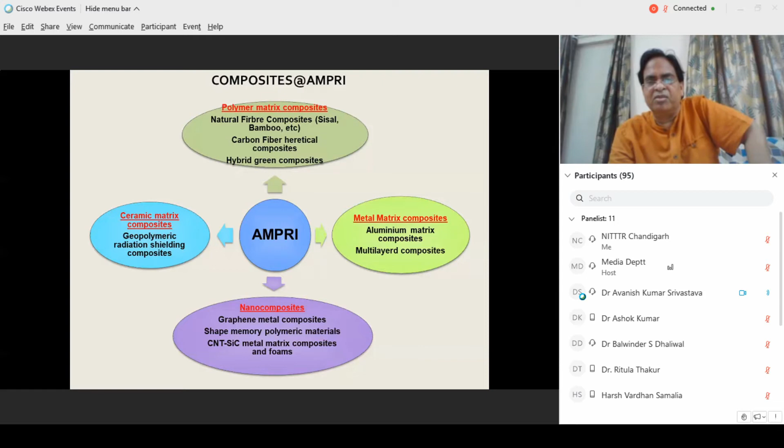Ceramic matrix composites, we have geopolymer, radiation shielding composites. Metal matrix composites, we have aluminum matrix composites, multi-layered composites, and nano composites. We have graphene metal composites, shape memory polymer composites, CNT silicon carbide metal matrix composites, and foams.

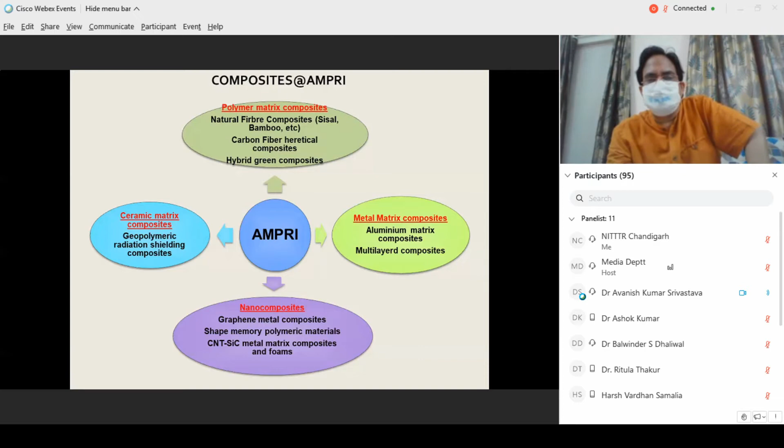Now these pictures are somewhere from the literature again. I did not put reference, so my apologies. But I tell you that metal matrix composites are very important for naval applications.

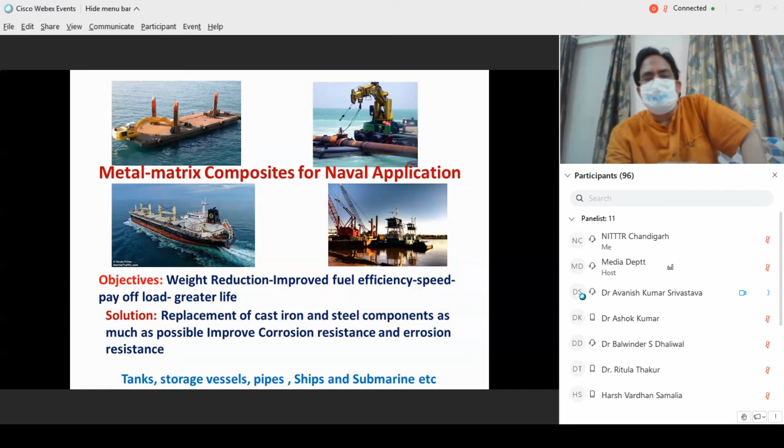The objective here is weight reduction, improved fuel efficiency, speed, payload, and better life. The solution is replacement of cast iron and steel components as much as possible, to improve corrosion resistance and erosion resistance in tanks, storage vessels, pipes, ships, and submarines.

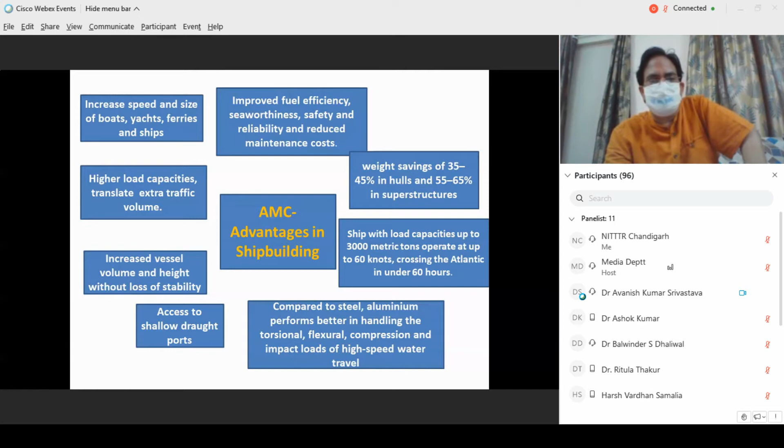Now, aluminum matrix composites, in terms of advantages in shipbuilding: increase speed and size of boats, yachts, ferries etc., higher load capacities, translate extra traffic volume, improve fuel efficiency, seaworthiness, safety, and reliability, and reduce maintenance costs. Weight savings from 35 to 45%, maybe more, increase vessel volume and height without loss of stability, and so on.

It has several required characteristics like good corrosion resistance, fire resistance and retardancy, higher specific strength and stiffness, impact toughness, and damping capacity.

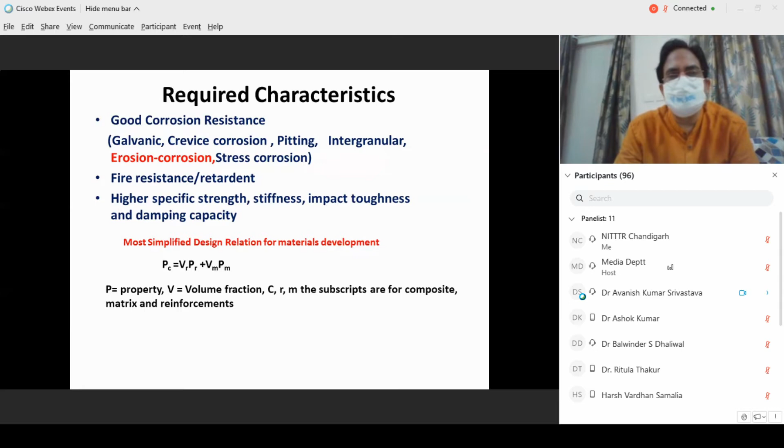So the advantages, if we draw from the mathematical point of view and from experimental data: density of the aluminum matrix composite can be reduced up to one-third of steel. It's resistant to weather, common atmospheric gases and liquids. Strength is quite good, and it maintains its toughness down to very low temperatures, with fair workability and formability, improved abrasion and wear resistance, modulus enhanced from 70 to 240 GPa in composite form, and a good thermal expansion coefficient.

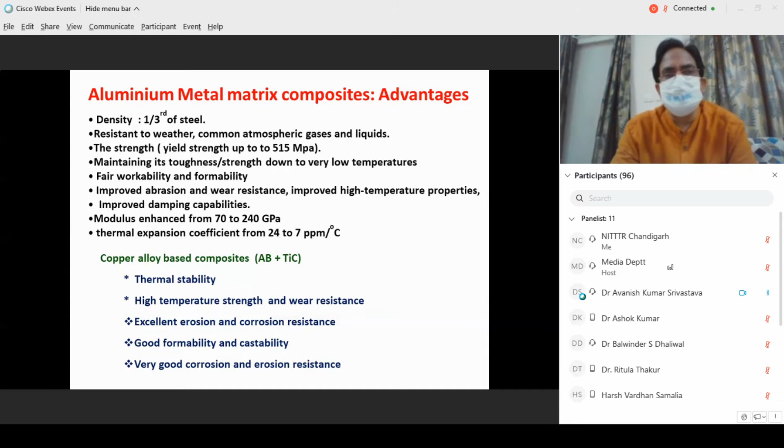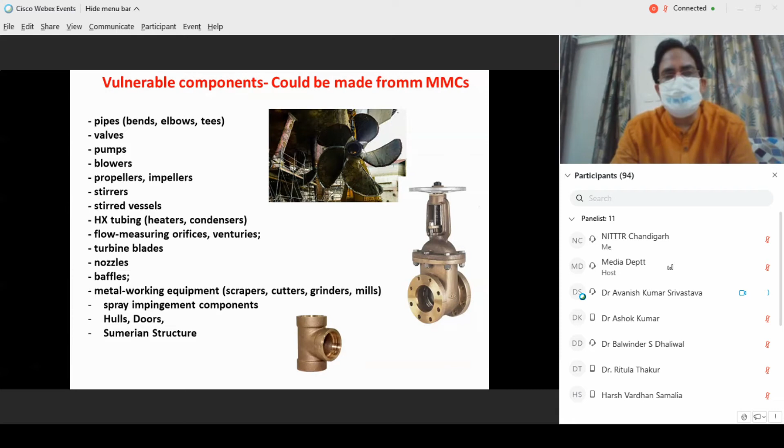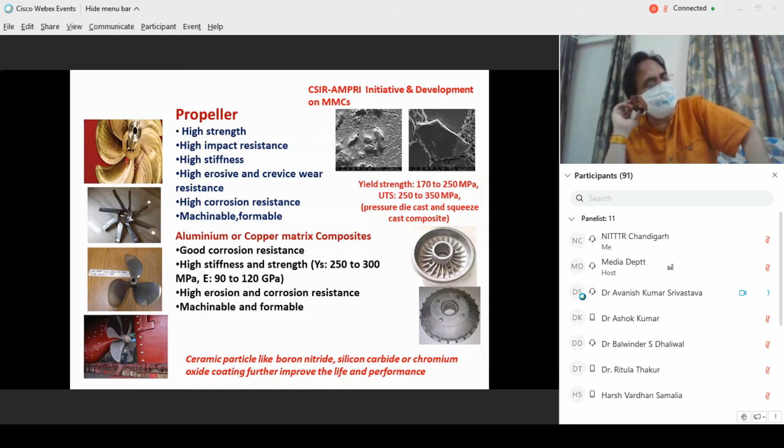So vulnerable components could be made from metal matrix composites like pipes, valves, pumps, blowers, propellers, stirrers, stirred vessels, flow measuring orifices, turbine blades, nozzles, baffles. You need in propellers high strength, high impact resistance, high stiffness, high erosive and crevice wear resistance, high corrosion resistance, machinability and formability. We need all these things, and the composites which we are making suffice this kind of requirement.

Then brake drums we can have, and similarly various other components which we can make. So far, these components are being imported from various countries.

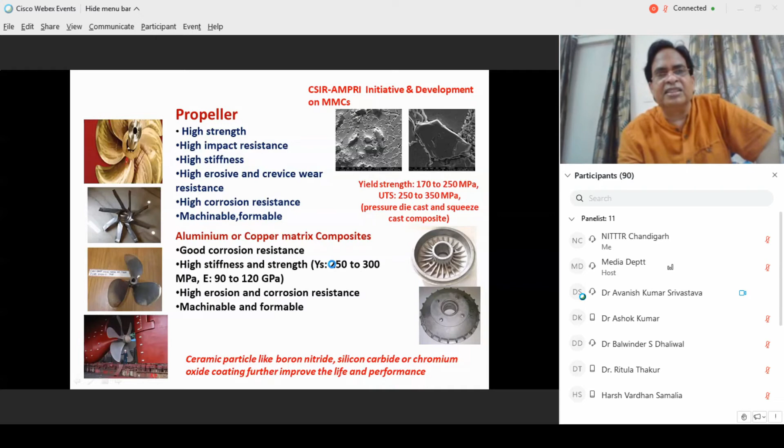Now, coming to closed cell aluminum foam: aluminum foam core steel face sandwich panels for doors and hulls can be made. Even building structures can be made. I'll come again to this slide.

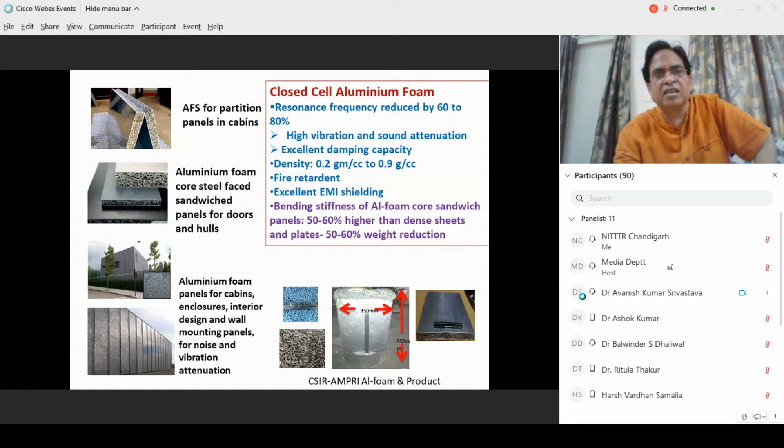The aluminum matrix composites, by stir casting and in-situ technology, we can make 60 kilograms per batch in lab. We have demonstrated brake drums, nose cones, pistons, and connecting rods, and the technology has been transferred. We are still in continuous advancement of these technologies. This is very important for automobile, defense, aerospace, and general engineering.

Closed cell aluminum foams, we can make 100 kilograms per day, we have demonstrated. Density can be varied from 0.2 to 0.8 gram per cc with very high porosity and very good sound absorption. This is important in auto industries for crash worthiness, weight reduction, sound and vibration control. In defense, it's very important for blast resistance, armors, rail and shipbuilding.

An open cell foam of nickel, copper, carbon and titanium, and even aluminum, titanium, stainless open cell foams we can make. Titanium foam biomedical application trials are going on in animals, and for filters, heat sink, catalysts, batteries, capacitors, EMI shielding. So many applications are there, and we are working on various applications.

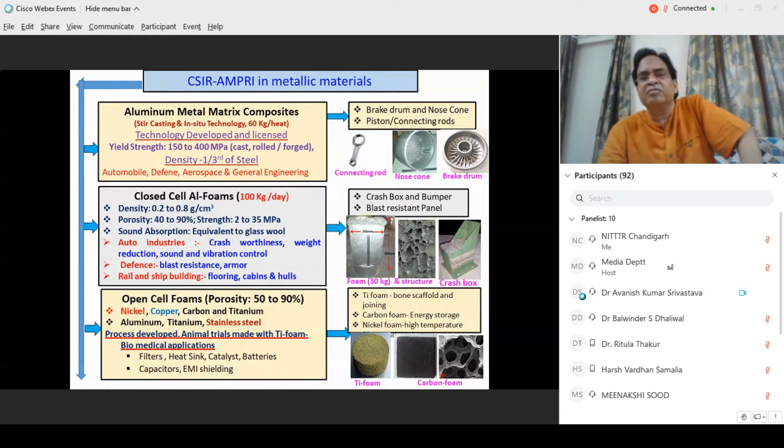We are filing our patents. As far as metallic metals, alloys, composites are concerned, we have already more than 200 publications, and more than 10 patents. Then we have PhDs, MTech theses, technology licensed, and interaction with industries like Tata Motors, Mahindra, Next Motive, Ordnance Factory, and so far 10 technologies are at a very good technology readiness level, TRL more than 4.

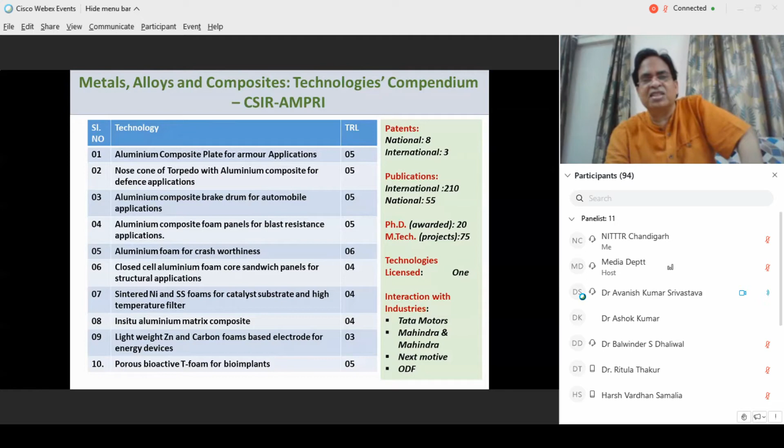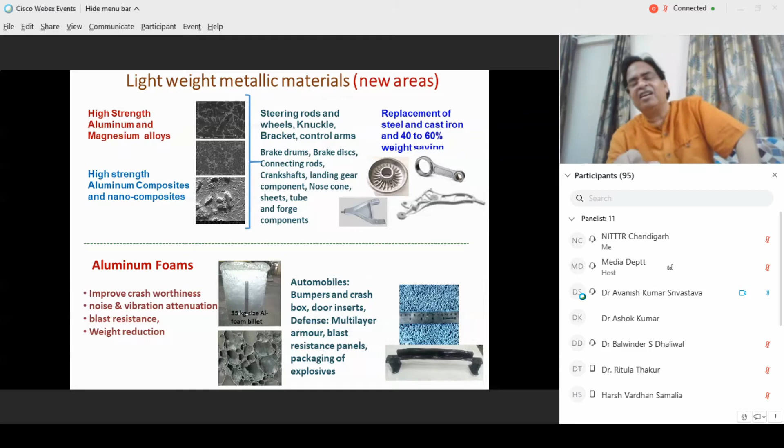As I said, connecting rods and brake drums are from high strength aluminum and magnesium alloy composites, nano composites. Aluminum foams are again important for automobiles, bumpers, crash box, door inserts, and so on. We also do various simulation studies to check, verify, and authenticate our experimental observations, and very good simulation work is being done in the laboratory.

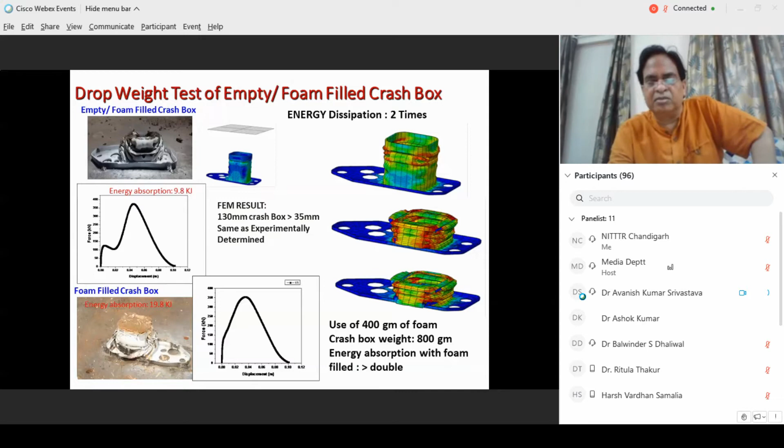Now coming to graphene, that is one allotrope of carbon, and graphene is like a sheet structure having honeycomb design with carbon atoms on the vertices of the hexagonal network. You have single layer graphene and multi-layer graphene. The advantage of graphene is it has the highest surface area, is 100 times stronger than steel, has very good tensile strength, very good Young's modulus, very good thermal conductivity, and good electrical properties. All these important properties make graphene an ideal reinforcing agent in today's world.

We have done this to some extent. We have used stainless steel as a base matrix material, and we incorporated graphene using 3D printing, additive manufacturing, because liquid metallurgy is not a good option for making composites using graphene.

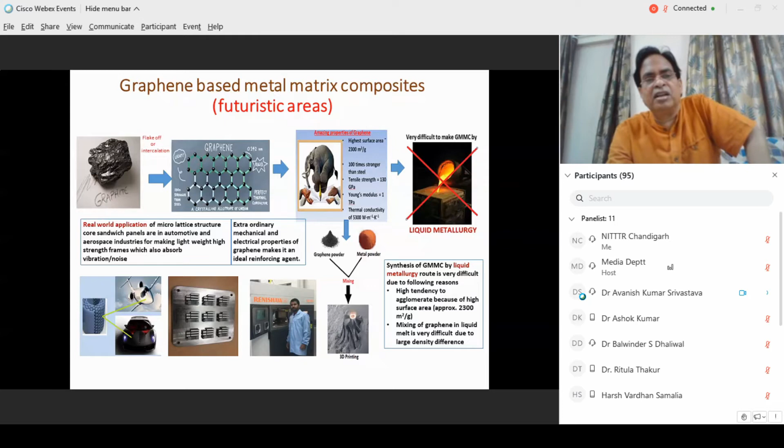Electromagnetic forming is another technique to join dissimilar metals like SS-niobium, SS-titanium, and so on, where you have a very thin interface with very little disturbance compared to the welding process. This is another advanced processing technology which CSIR AMPRI Bhopal has, and we have projects with atomic energy and aerospace related organizations where joining is concerned, and we are trying to make different components for them.

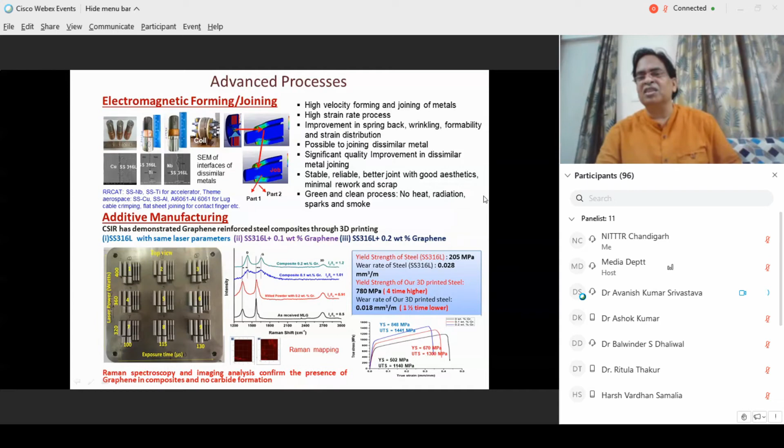Then in additive manufacturing, as I said, we added graphene in stainless steel, and you can see the rods, different kinds of rods we have already prepared. We are probably the first in the country to do this - not to boost ourselves, but this is a fact. We have published graphene metal composite material papers in international journals like Additive Manufacturing, with impact factor more than 6, and Materials Science and Engineering, and so on. You can go through those papers if someone is interested in working on these new areas.

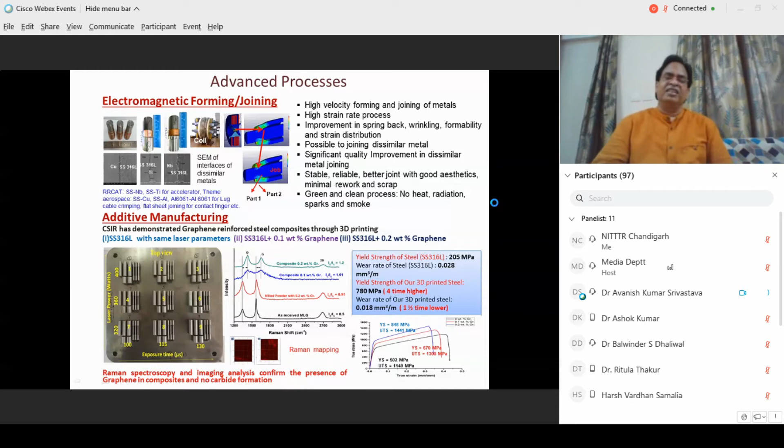Then, as I said, hybrid composites from fibers and waste particulates. We are working with particulates from waste like fly ash, red mud, marble waste, agro waste, and renewable resources like natural fibers - jute, sisal, and so on - mixed with a very little amount of polymers. Although we say the matrix is polymer, basically the matrix is the particulates, it's just reverse. The kind of products we are producing can replace teak wood, and we can stop this kind of deforestation by using these alternate materials.

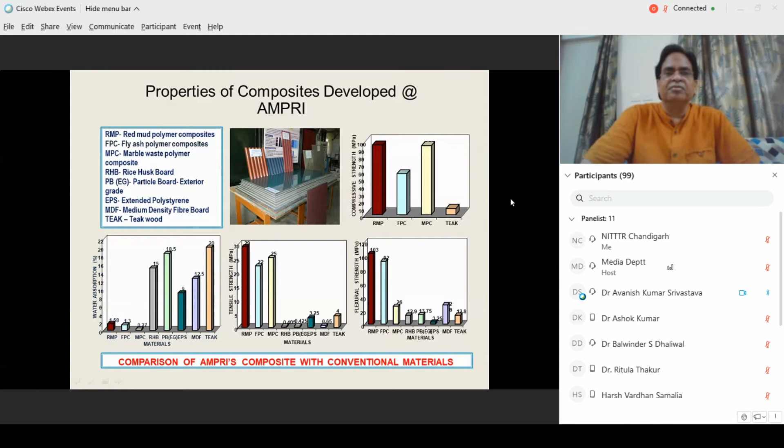So advanced hybrid green composites, I covered a bit. These are the composites which we are making, and they have applications in door, wall tiles, partition, furniture, and architectural cladding panels, as alternatives for timber, helping avoid deforestation. Using fly ash and natural resource management, we save the environment and bring a new class of material to society.

Production process is simple and energy saving, stronger than wood and synthetic wood. Durable and customized products can be made. Resistant to moisture, corrosion, termite free, fire self-extinguishing nature, cost effective than teak wood, timber products, and synthetic wood, and maintenance free materials. We have already protected IPR. In most of these technologies, we have our own patents.

So the opportunities are quite high using this hybrid green composite. At two places, we have already transferred our technologies, like to Siddhi Polymetrics in Maharashtra. And using these sisal-based composites, just a year back, we transferred know-how to the West Bengal government also, under the MGNREGA program, that is Mahatma Gandhi National Rural Employment Guarantee program, for poor people, villagers. Their officers also came here and got trained from us.

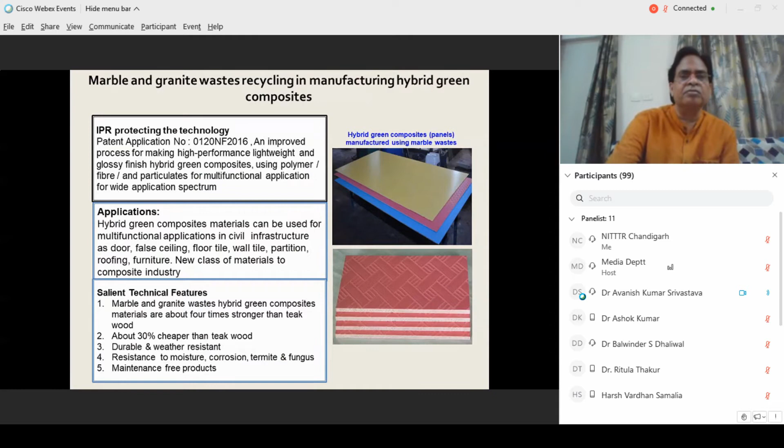So you can see the kind of products which we are making, and these are the products at the size which you get in the market. In this case, we are running like a small factory in a national lab, I can tell you. These are some examples of how you can use these composites in door, false ceiling, floor tile, wall tile, partition, roofing, furniture, etc.

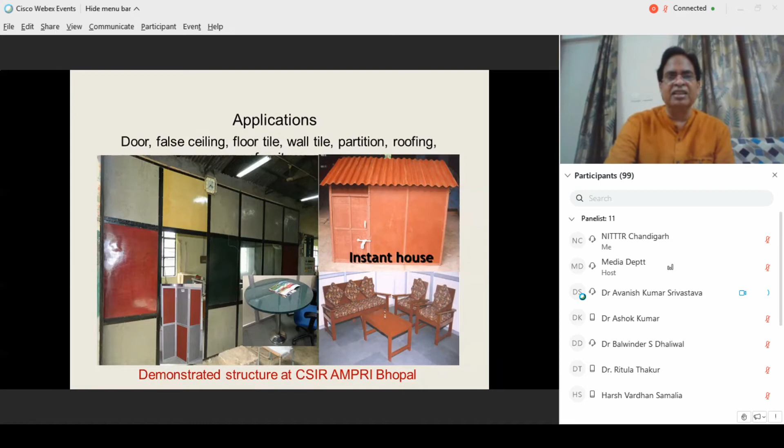Now, if I go back to naval ships history, we are interacting with the Indian Navy, so I have some knowledge about the kind of material they require and what they are doing at present. If you see 1970 to 1980, the emphasis was on glass fiber, polyester, PVC foam for magnetic structure, shock resistance, maintenance cost.

Then 1990 to 2000, emphasis shifted to radar signature, weight reduction, along with magnetic structure, shock resistance, maintenance cost. The materials moved to carbon glass fiber, PVC foam, weight optimization, and also material cost considerations. Now in future, from 2010 onwards, it is more about fire resistance, ballistic protection, damage tolerance, and of course radar signature, weight reduction, magnetic structure, shock resistance, and maintenance cost.

So now the materials are carbon glass fiber, a variety of matrix systems, core materials, vacuum infusion, weight optimization, quality assurance, and expensive material costs are all taken care of. So that is one story of what kind of desire and thoughts are coming up from the Navy.

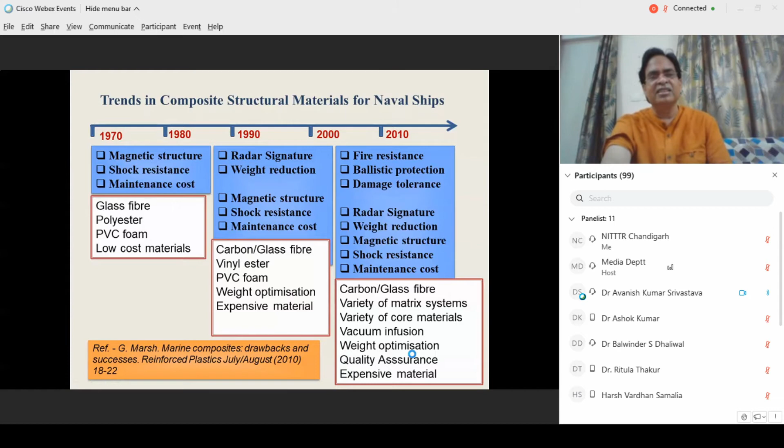Very recently, just a year back, we transferred one of our technologies to Messrs. Prism Johnson, non-toxic lead-free radiation shielding materials, made from red mud, which again is waste from the alumina industry. It is accredited by the Atomic Energy Regulatory Board, Mumbai, and also included in their list of materials for making diagnostic X-ray rooms on their website.

We are also coming up with the first Center for Advanced Radiation Shielding Materials to upscale various non-toxic radiation shielding materials in the country. Technology of radiation shielding materials has already been transferred to Messrs. Prism Johnson. Before that, it was transferred to Messrs. Assurays. And we have patents here.

We have demonstrated this technology to one very big hospital of more than 200 beds in Maharashtra, that is Saideep Multispecialist Hospital, where in X-ray rooms, CT scan rooms, cath lab, etc., they have used our technology, this radiation shielding tiles. It is again accredited by NABH, the Hospital Accreditation Board, and they have got a good rank.

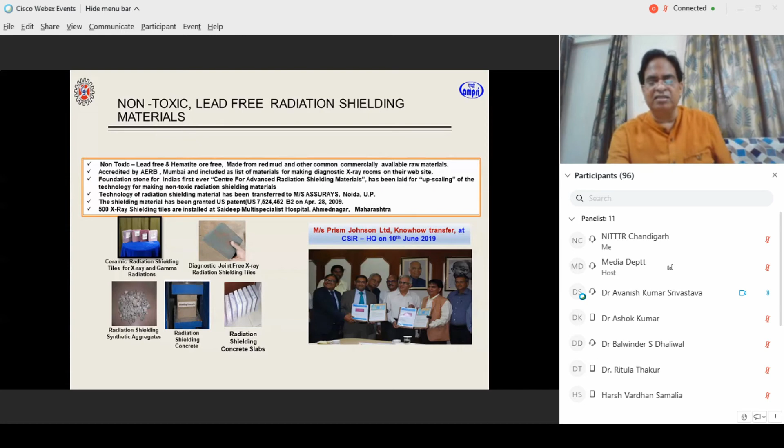We have also transferred a technology of geopolymer concrete, a cement-free material. Instead of cement, you can have an alternate material made of fly ash, and using a special process, you can convert it into a material which is cement-free but works as cement. We already have 3 patents in this direction, and it is 100% replacement of cement, a water-curing-free process, ready for use within a week, and it enables bulk fly ash waste utilization. It's environmentally friendly because during the cement-making process, almost an equal amount of carbon dioxide is released, whereas in this case you can have an 80% reduction in carbon dioxide release.

So it's more user friendly, economically viable, and environmentally friendly. We have demonstrated roads in our campus and also a patch of road at AIIMS, the All India Institute of Medical Sciences in Bhopal, which is in use quite extensively.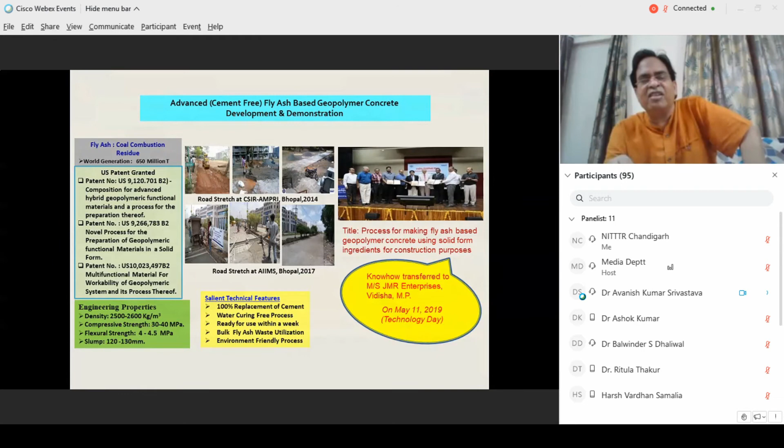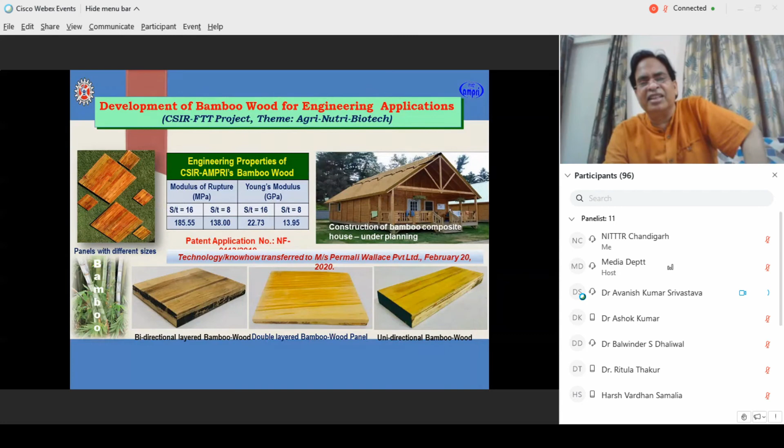Using our nanomaterials, alumina nanoparticles of gamma phase, we developed a water filter which is electricity-free and useful for removal of excess fluoride and excess arsenic. It's basically an adsorbent-based technology, and here the particle size of alumina is about 15 to 20 nanometers, with pores of about 3 to 4 nanometers in size. So it's porous alumina nanoparticles used for a water filter.

It's in use, and two companies have taken this technology. One is Messrs. MW Social Enterprises, an Indore-based startup, and the other is an established company, Marcus Project Private Limited of Uttar Pradesh.

This slide is a repetition, so I'll skip it.

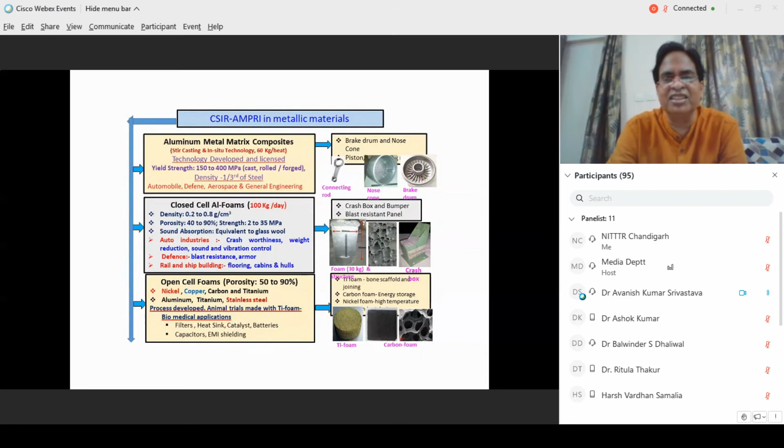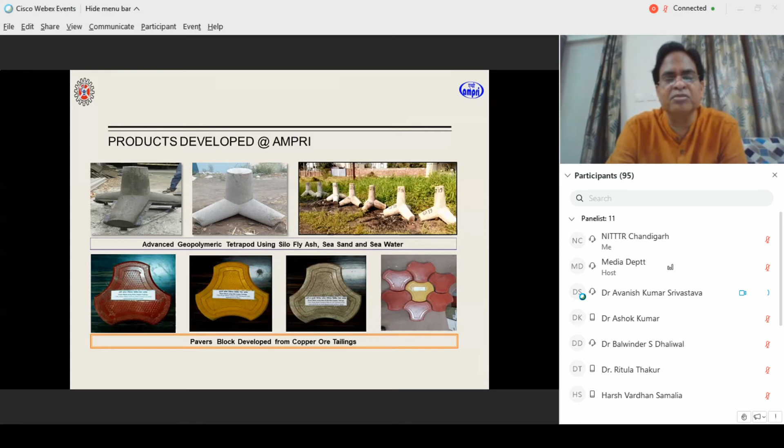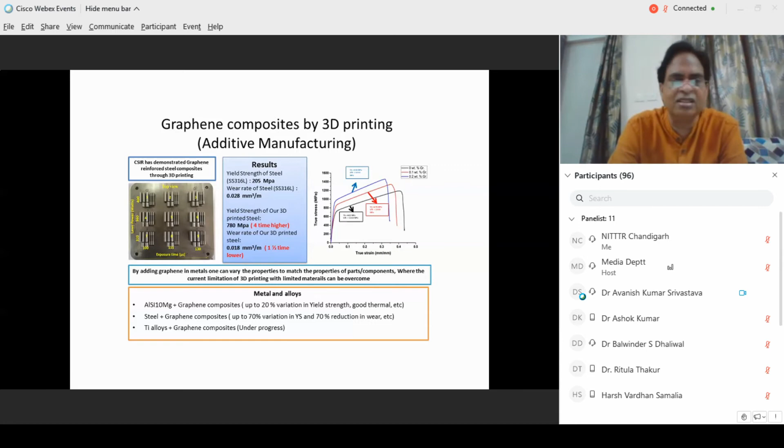Very recently, we published a paper in Nano Energy that has an impact factor of more than 15, and it is being well cited. This is on graphene zinc silicate piezoelectric nanogenerators. In short, even by tapping with your fingers, this device can generate enough energy to charge your mobile. So that's the kind of sensitivity-level device we are making using graphene and zinc silicate nanoparticles. This paper is already in open literature.

With the COVID-19 situation, our expertise got utilized there too, because with good chemical, physics, and engineering background scientists, we developed a sanitizer for daily use with extra care for skin, since people are scared that sanitizer may spoil skin. So we used some herbal ingredients, and now this know-how has also been transferred.

We have also developed a face mask for common purpose with a special design, and this too has been transferred to industry, MW Social Enterprises. The face mask is already in the market through the MW Social Enterprises website, where anyone interested can go and see the details.

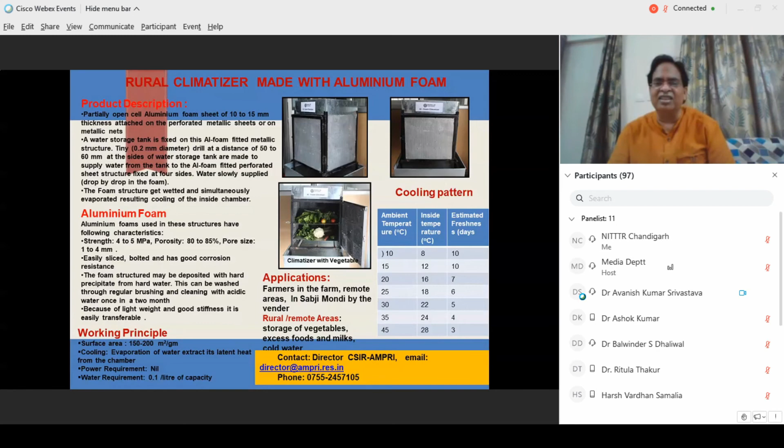So I'm not going to talk about that, but you can protect the vegetables and so on, you can store them. The temperature trend is that if ambient temperature is 10 degrees Celsius, inside temperature will be 8. If ambient temperature is 30, inside temperature will be 22. Estimated freshness days of your vegetables will be 5 days. So these are all practical observations which we have made, tested for a long time, and the technology is ready for the industry to take it.

Some discussions are already going on.

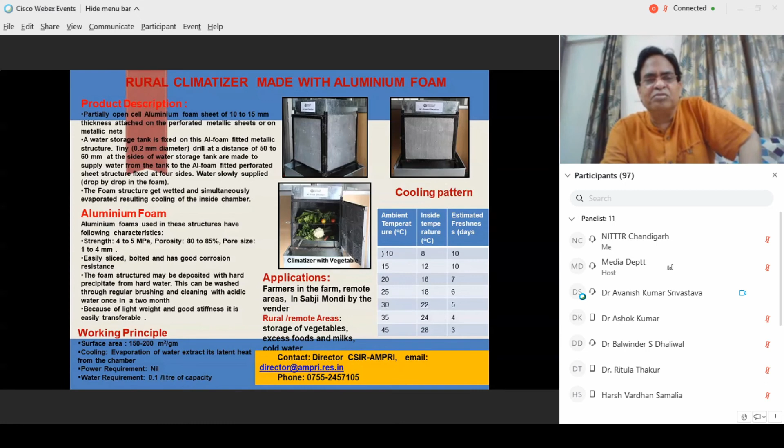Then parali - you know it's very closely touched to your area - it's agro waste. It's a problem of Punjab, Haryana, Delhi. Especially the problem starts from October to December, goes up to January - that parali burning. So it's a waste, and we started working on this.

We took some samples in kgs from Haryana region villages and made the product out of that. So again, the technology is ready for the industries to take it and make small industries in Haryana and Punjab and use this parali waste to make a composite, which is again a replacement for teak wood and all - for housing purposes, furniture, and so on. This technology is very useful.

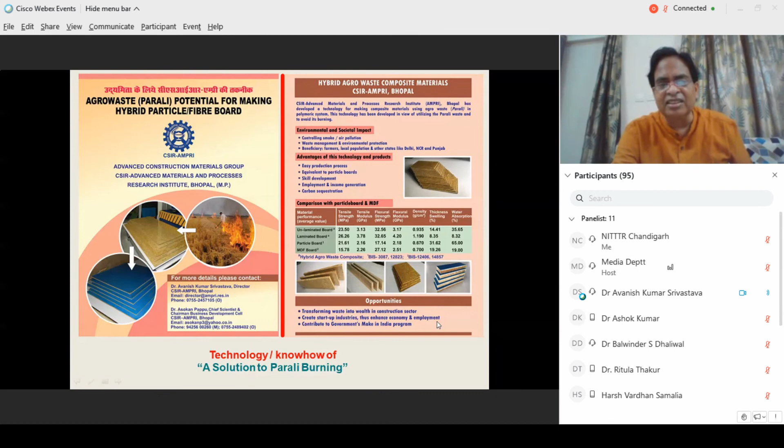So with this, I conclude and I stop my presentation here. We are interacting with academic institutes, industries, national labs, and strategic partners like defense. We are interacting with everybody depending on their requirement. Jointly, we are developing the products, and some of the products, as you have seen, are in the market. So this is what I wanted to say - a step towards Atmanirbhar Bharat, using composites based on advanced materials and processes. Thank you very much for your kind attention.